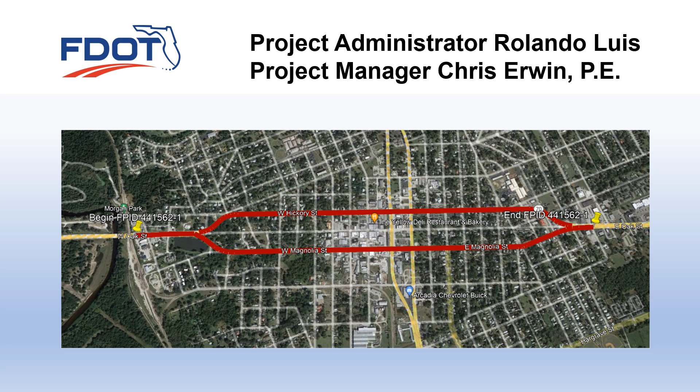If you attend the in-person meeting on July 25th from 6 to 8 p.m., you will be able to submit your comments at the meeting. Comment sheets will be provided, and you will be contacted after the meeting with a follow-up to your questions or comments.

For the virtual meeting, virtual attendees will remain muted throughout the presentation. If you experience technical issues during the meeting, please type the issue in the question pane on the control panel to report it. There is also a Help tab on your upper right corner control screen. Press on that and it will give you links to go to technical support.

To provide a comment, submit it via the questions box. A copy of the presentation can be found on the project website. As said earlier, responses to all comments and questions will be provided later. All comments and questions submitted through these options are part of the public record for this public virtual meeting and will be considered by the department during project decision-making.

The meeting video link will also be posted on the website. The public comment period will remain open through July 28, 2023 to accommodate the public who view the meeting video after the live event.

The Florida Department of Transportation is required to comply with various non-discrimination laws and regulations, including Title VI of the Civil Rights Act of 1964. Public participation is solicited without regard to race, color, national origin, age, sex, religion, disability, or family status.

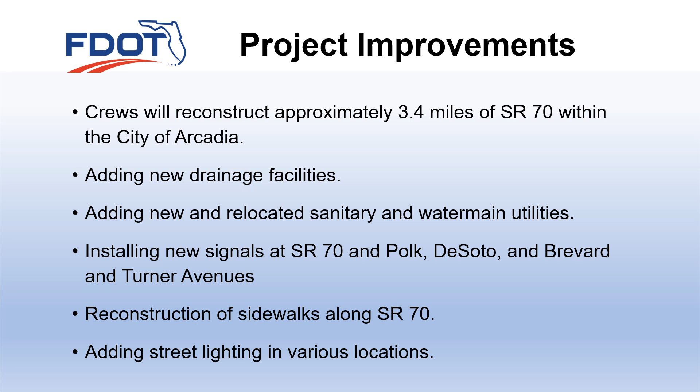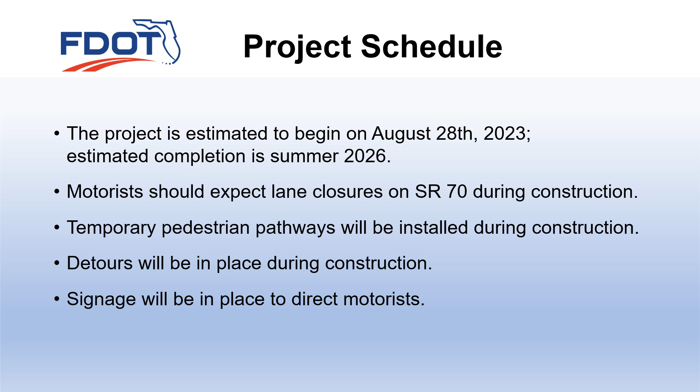The project is estimated to begin on August 28, 2023, and there will be lane closures on State Road 70 during construction. In addition, pedestrians will utilize installed pathways while crews work in those areas. As you will see later in the presentation, there will be some side street road closures and detours will be in place during that phase.

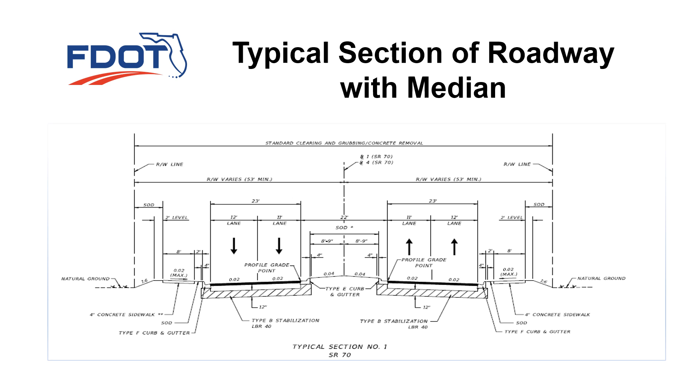This typical section represents State Road 70 at the east and west ends of the project. These sections are outside of the city of Arcadia and are separated with curbing and a 22-foot sodded median. Both eastbound and westbound curb sections are 23 feet wide, with an 11-foot inside lane and 12-foot outside lane, with a slant of 2 percent for drainage going to the low side gutter of the roadway. There will be 8-foot sidewalks on both sides of the roadway.

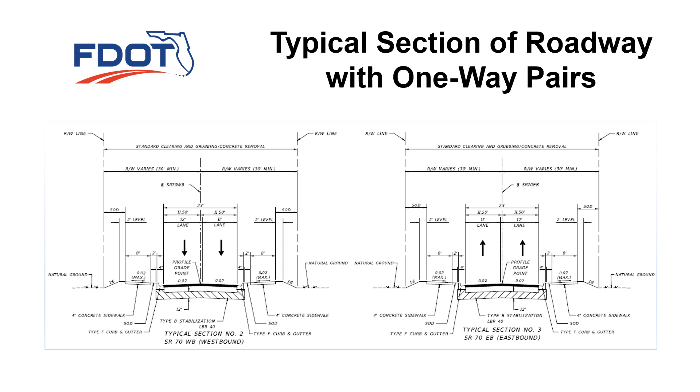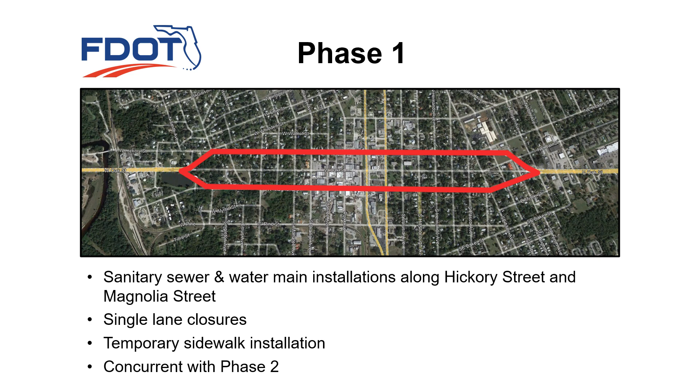The project will start with Phase 1, which consists of utility improvements along Hickory and Magnolia Streets. Crews will use single lane closures, moving from the east end of town towards the west as crews install the new sanitary sewer and water main lines. When crews are finished with each area, temporary walkways will be constructed to reestablish pedestrian access.

As Phase 1 progresses, crews will also begin work in Phase 2. In this phase, the entire roadway will be reconstructed starting at the Peace River and ending where State Road 70 splits into Hickory and Magnolia Streets. This will include drainage, sanitary sewer, and water main improvements, followed by reconstruction of the concrete and roadway.

This will take place over several different stages. Crews will use single lane closures to close first the outside lanes, and then the inside lanes as State Road 70 is completely reconstructed. It is anticipated that this section of work will take approximately 9 months to fully complete.

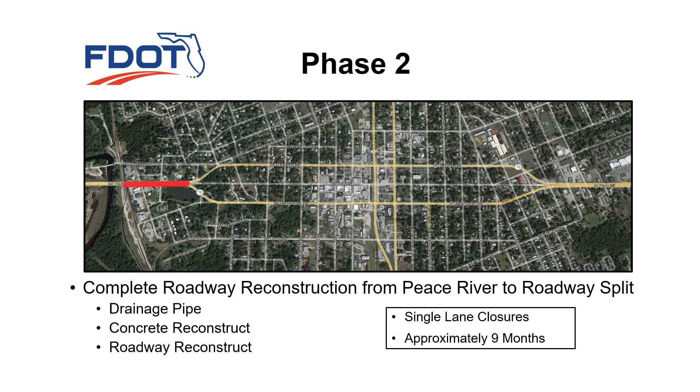Following the completion of Phase 2, crews will resume work along Hickory and Magnolia Streets as they begin installing the drainage pipe and reconstructing the roadway. Crews will build this portion of the project in 2 separate stages.

First, crews will close the northern lane of Magnolia Street and southern lane of Hickory Street and completely reconstruct those portions of the roadway. Once that work is complete, crews will flip traffic to the other side of the street and reconstruct the second half of the roadway.

In addition to the work in Phase 1, it is anticipated that this section of the roadway will take approximately 2 years to complete.

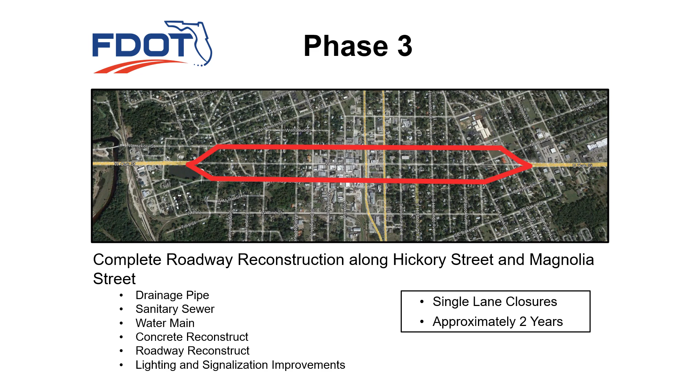Halfway through Phase 3, crews will begin work on the east side of the project. 1 lane will be closed at a time as crews work their way from the south side of the road to the north side. In addition to usual improvements, crews will also reconstruct the box culvert between Roger Avenue and Southeast Baker Street. It is anticipated that this work will take approximately 6 months and will finish before the rest of the work in Phase 3.

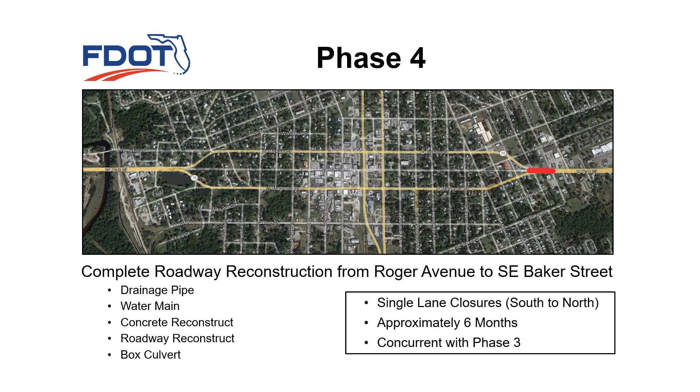Once Phases 1 through 4 have been completed, crews will begin the last phase of the project. This will consist of placing the top lift of asphalt on the entire project, installing the final roadway markings, and installing the project signs. This phase should take approximately 2 months to complete.

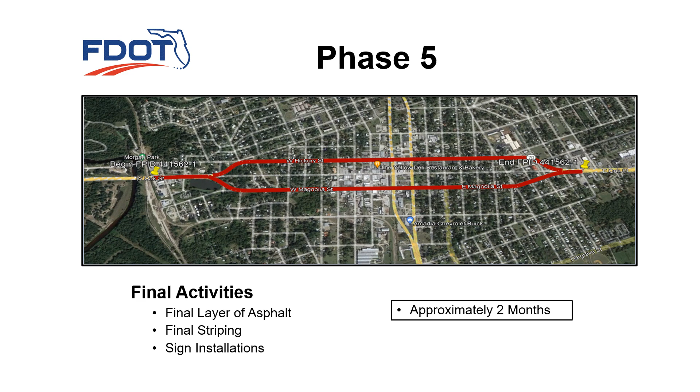As stated previously, this project consists of a full reconstruction of State Road 70 from the Peace River to Southeast Baker Street. This will include signal replacements, new signs, and pavement markings, as well as mid-block crossings. Once the project is complete, the speed limit will be set to 35 miles per hour.

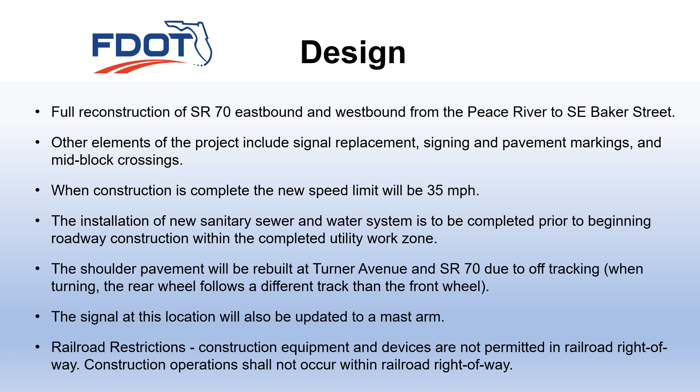This work will not encroach on the railroad on the west end of the project.

Throughout the entire project, several changes will be made to ensure pedestrian and vehicular traffic are able to navigate as needed. This will include several truck detours, but only one will be in place at a time, and those will take place only between Friday at 6 p.m. to Monday at 6 a.m.

Temporary sidewalks and crosswalks will also be constructed at various locations. These will be placed at the beginning and end of the work zone to maintain access. Should a temporary sidewalk not be feasible, crews will then implement pedestrian detours to divert traffic around the work zones.

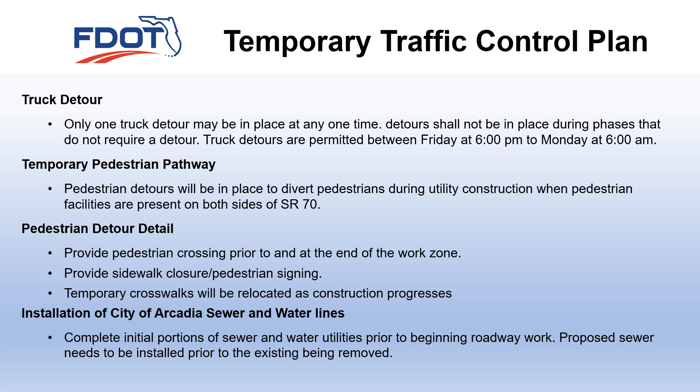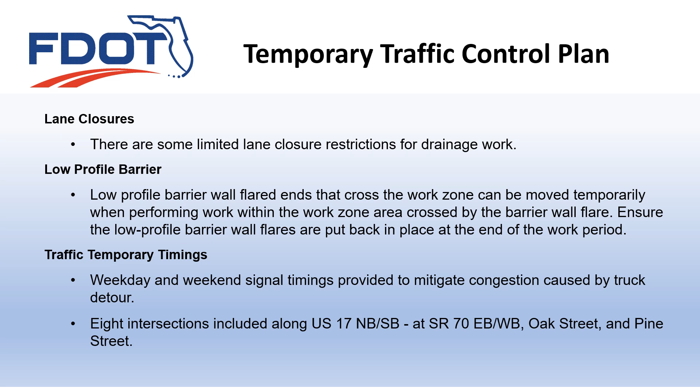In addition to the truck detour, there will also be single-lane closures throughout the project. In such instances, temporary low-profile concrete barriers will be installed to prevent vehicles from entering the work zone.

Here are some more general notes about the construction in different phases. Notably, the drainage pipe crossing at US 17 can only be performed at specific times.

Southbound US 17 can have 2 lanes closed between 6:30 p.m. and noon, after which the last lane can be closed at any time. The northbound US 17 requires 1 lane to be maintained at all times, with the other lanes getting closed only between 7 p.m. and 7 a.m. Only one direction of travel, northbound or southbound, can be closed at any time.

In addition to this, the drainage pipe installations will require the closure of side streets as well. These can be closed at any time, but detours will be installed, and no more than 3 streets can be closed at any time.

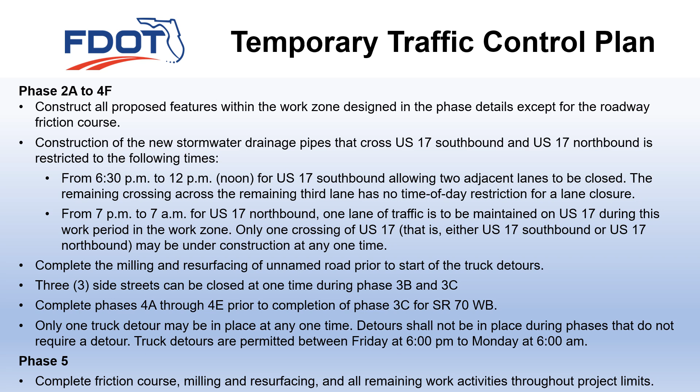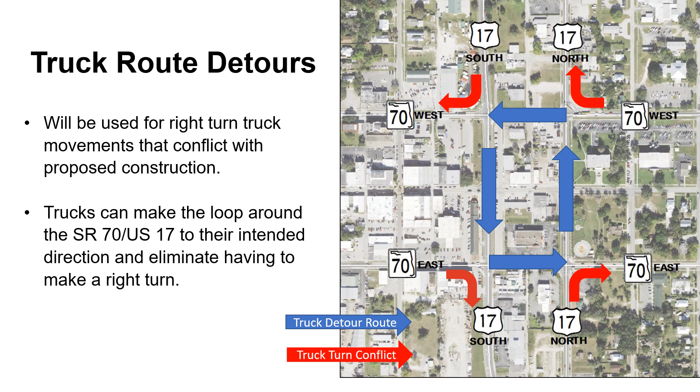To facilitate some of the work along US 17, truck detour routes will be implemented to maintain traffic. In this instance, when right turns conflict with the proposed construction, traffic loops will be installed. This will allow vehicles to circle around US 17 and State Road 70 to travel in whichever direction is needed.

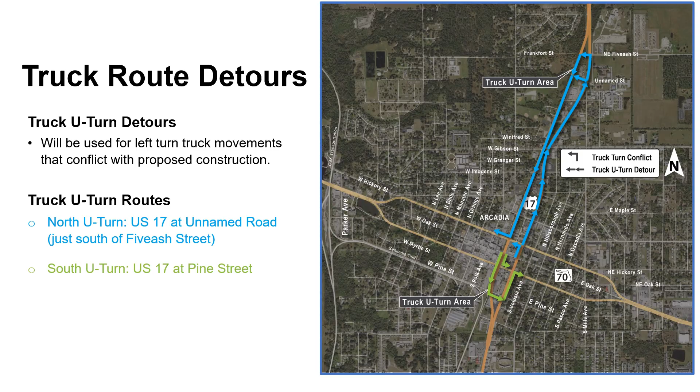When left turns conflict with the proposed work, U-turn detours will be used. 2 such instances will take place at the unnamed road south of Fiveash Street and at US 17 and Pine Street. In addition to the improvements previously discussed,

Crews will work on the lighting on State Road 70. New lighting is to be installed at 6 intersections on the project, where Hickory Street and Magnolia Street intersect DeSoto Avenue and Brevard Avenue, where Hickory Street intersects Polk Avenue, and where State Road 70 intersects Turner Avenue.

State Road 70 in front of Lake Katherine and Magnolia Street from Orange Avenue to DeSoto Avenue will also have their existing light poles relocated.

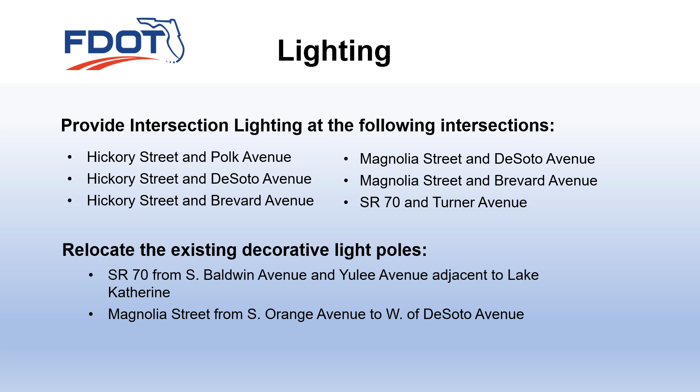Continuing with the electrical work, several intersections are to receive upgrades to their signals. These will take place at the same intersections as the new lighting.

Lastly, in addition to the new sewer and water main installations, we will also construct new connections for the residents alongside the project. This work will take place alongside the previous utility work in Phase 1.